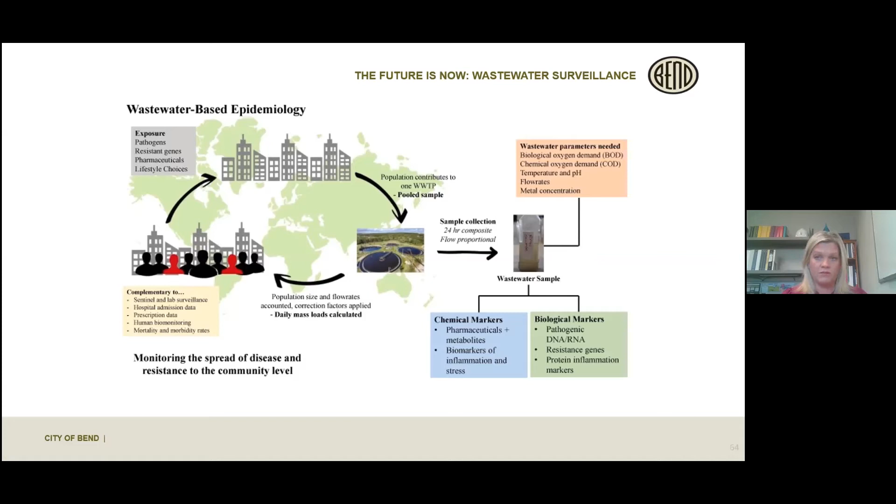So they've already formed a partnership between CDC and EPA and started this wastewater surveillance program. It's going to be a national program. We already have colleges across the country using it to determine whether students can come back into the dorms, or whether they need to be moved into hotels if they see an outbreak. So it's an early indicator.

You can look at the CDC's website about the wastewater surveillance, and it's going to tell you a lot about it and explain in greater detail. So I'm going to kind of give a high-level view of it.

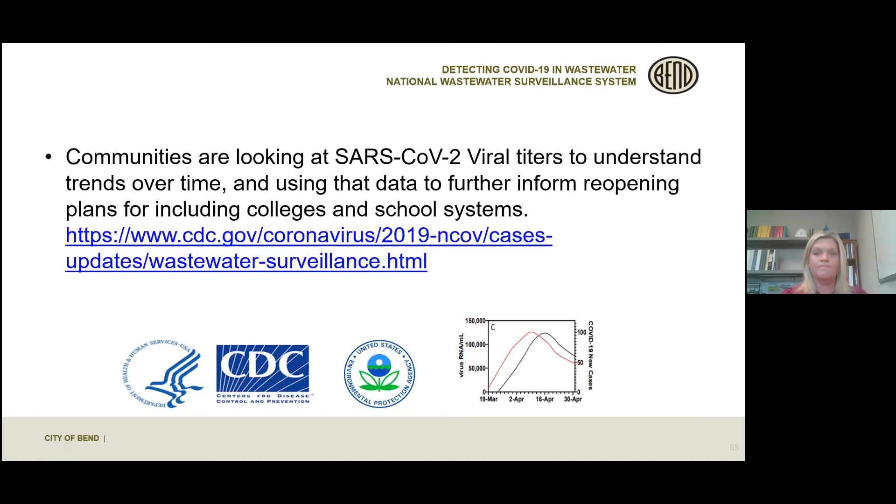So we started out with BioBot, as I said, and then we had Oregon State University reach out to us when they heard we were working with BioBot, and they were interested in doing what we call split samples, so that we would take the same sample and send it to BioBot and send it to them to test a different methodology. So we said, sure, we'll sign on for this.

The other cool thing about the Oregon State study is they wanted to come and do a trace study in Bend, which means go door to door and do nasal swabs on people. At the same time, we installed wastewater samplers to isolate the waste from those neighborhoods so we could compare the wastewater and the test from the nasal swabs door to door. Super useful study—no one else had done that to this point. It kind of looked at how that wastewater epidemiology was working.

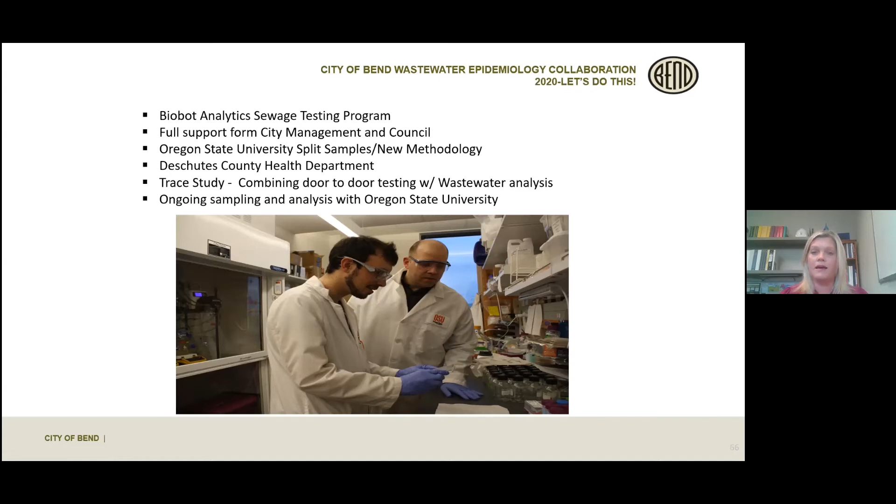And now we are working solely with Oregon State. I want to go to the next slide and show you a video of what we're doing, this little PSA that we put together.

In short, what we're looking for is the coronavirus signature in wastewater. We already had the ability to test for other toxics within our sewer shed, so being asked to test for COVID-19 was not much of an add-on for us.

It's a very rapidly spreading disease, and the fastest way that they can track it is actually through wastewater. The idea is when people become infected with COVID virus, they will shed it through the wastewater, even if they're asymptomatic. So this is a way for us to detect infected individuals, even if they aren't showing symptoms.

And with a single sample, we can monitor an entire city or hundreds of people in a building. So what we hope to have, and I think we're making very substantial progress toward this, is reliable early detection that would give us a signal before we were seeing an uptick in case numbers.

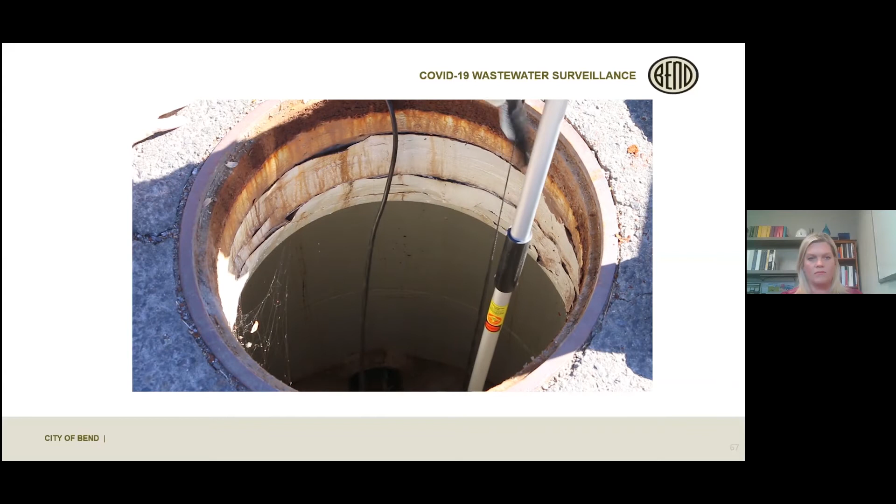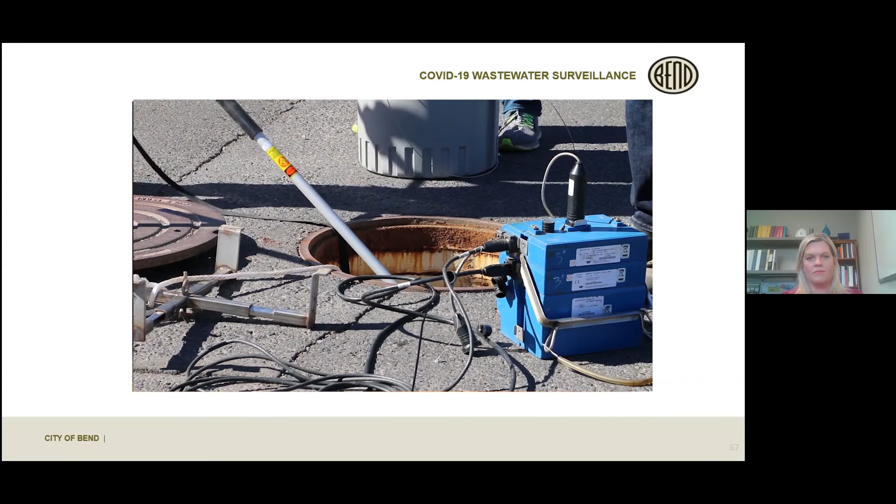We set up composite samplers throughout the city at different points to create sections of the city that we can monitor and look at. We pull up to the testing site and install a sampler into the manhole. From there, once we grab our 24-hour sample, we then send that sample to Oregon State.

They run their tests. The literature on this is fairly clear that in general we'll see a wastewater signature roughly about a week before you'll see other indicators, such as increased hospitalizations or increased cases documented by the local county health authorities.

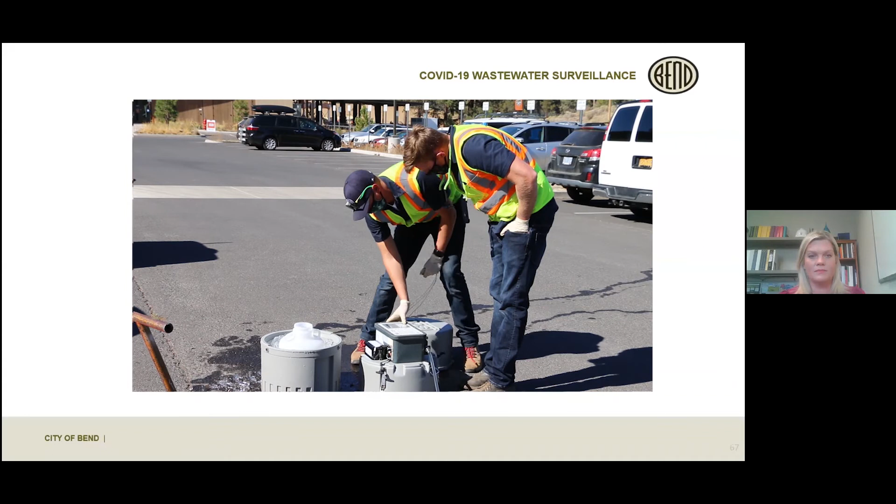We had one relatively large outbreak in a long-term care facility, and we were able to test wastewater in parallel with that and indeed confirm that at the time we had many cases, we were also seeing a detectable, substantial rise in that signal. So the main thing that our department does is we've

encouraged developing this as a potential early warning system. I don't know that it's quite developed enough yet to be reliable as such, but it should be a good way of finding out early if there's an outbreak starting in the community.

It's great for the city of Bend that they do have the forward thinking to be so innovative and to jump onto something that's new and quite possibly could be what's going to solve the next pandemic, or help us predict maybe when a future outbreak will come.

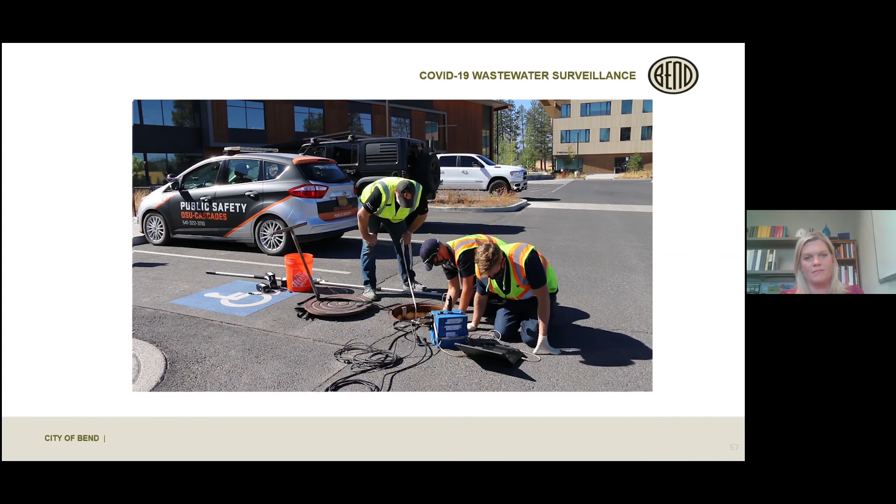Generally speaking, wastewater surveillance has been considered to be a leading edge indicator, giving you about a week's head start on when more infections will start showing up in the general populace.

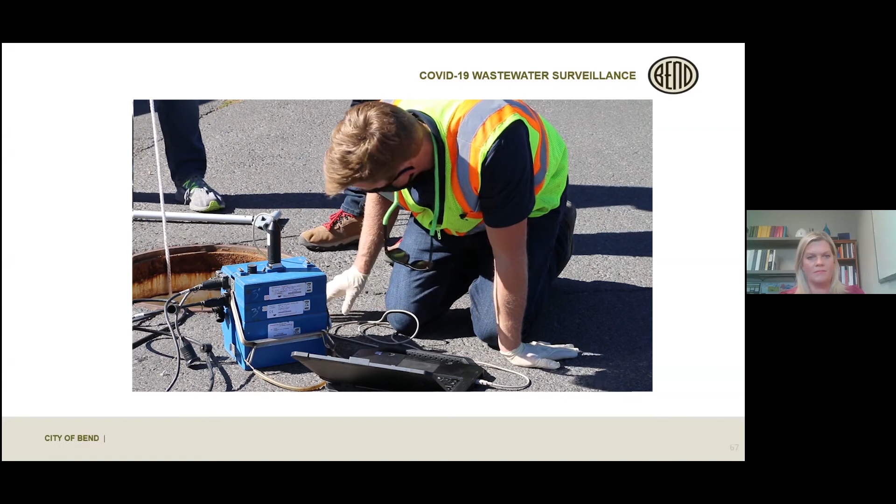We're doing research and development at the same time that we're trying to do surveillance and disease intervention and control. So doing all those together is very complicated. We want to be honest about what we are learning, and then distinguish that from what we hope to learn.

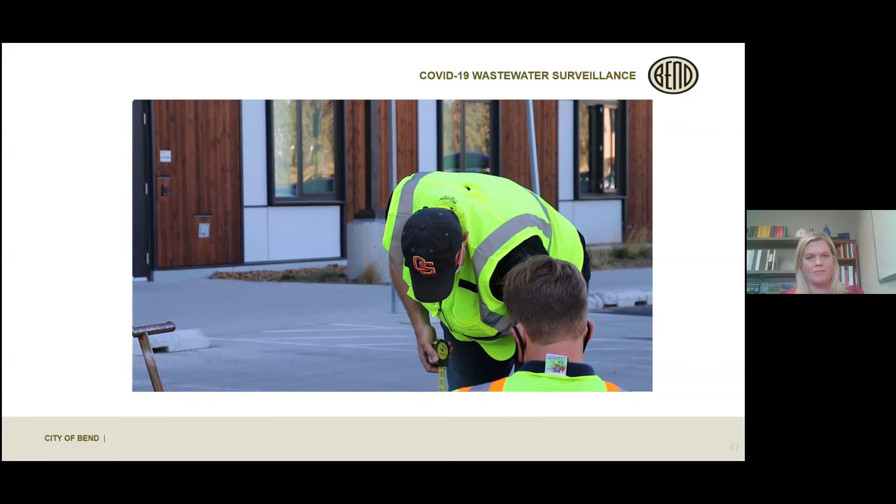Once COVID came along, we partnered up with OSU, and they taught us how to properly preserve the samples for this specific test they do for COVID, the PCR RT analysis they do on the wastewater to show the different viruses within it.

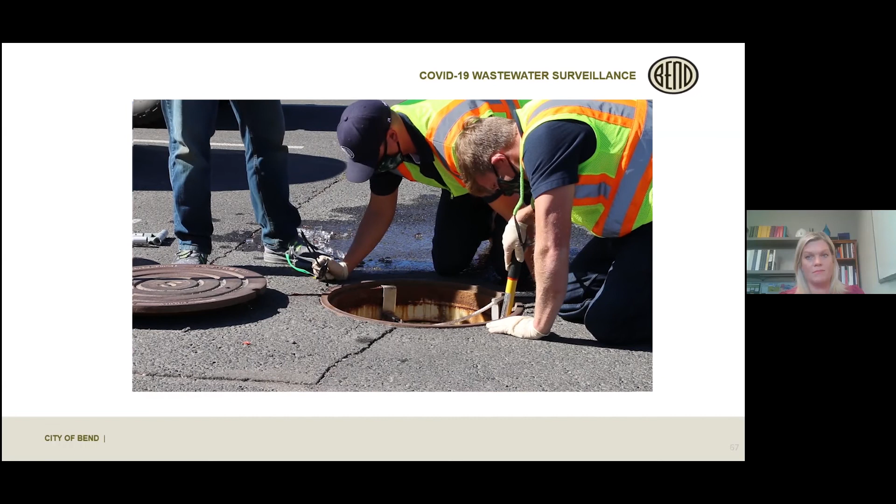Through the Oregon Health Authority, we are now reaching out to over 40 cities across the state to start monitoring their wastewater on a weekly basis for the next 2.5 years. The concentration and sampling effort that Bend Wastewater is doing I think is very fruitful, and the work OSU is doing in parallel with that is very fruitful.

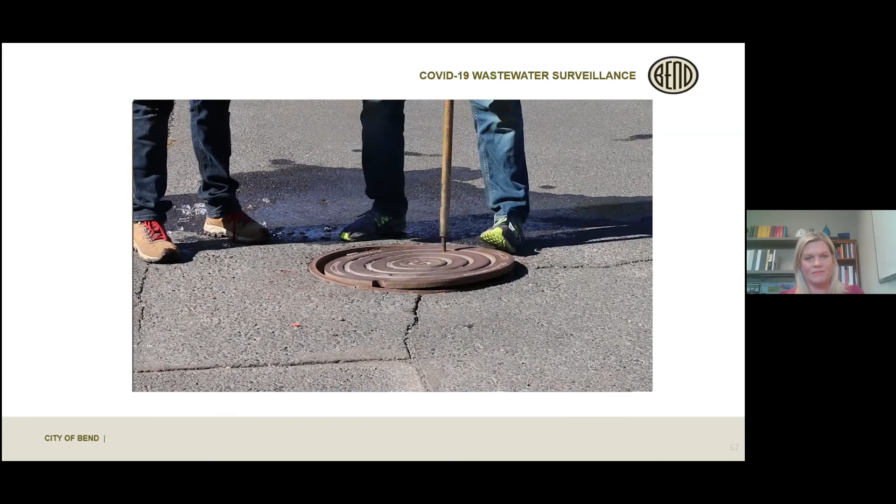Yeah, definitely it gives me a sense of pride that I'm helping keep us open and keep us safe, and if there is an outbreak that we can provide this information.

So as you watch that, the cool thing is I want you to pay attention to our sample manholes, how they were installing equipment in there. And that's something I'll bring up quickly at the end, where the PVC industry could probably help us make our sampling easier, more consistent. So I'm going to completely switch gears now from COVID and go into the brewing industry.

So I mentioned we have this great water in Bend. We've become known as a brew city. Again, like lift stations, we go back and forth with having the highest number of breweries per capita, competing with Portland, Maine, and I think Portland, Oregon. Currently we have 24 breweries, a cidery, a distillery, and kombucha makers. So we have a really thriving beverage industry here in Bend.

Next slide, please. I like to tell a little bit about brewery waste because there's a lot of misconception about it. Craft brew waste is what I'm talking about specifically. In the wastewater industry, when a brewery comes to town, plant managers freak out. I'm like, well, why is this? Because most of them are pretty tiny.

So brewery waste is one of the oldest industrial wastes. This is a picture from a brewery in, I think, Cleveland. Way back, before there were any metal finishers or steel manufacturing, you had breweries, dairies, and tanneries. So a very old waste, and it was very hard on polluting. They were direct dischargers into the river.

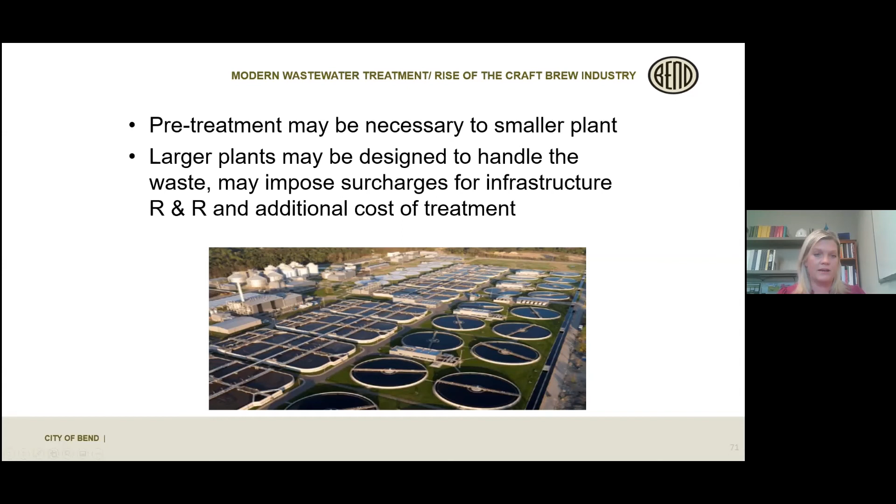So in Bend, we choose a surcharge program. We have the legendary Bend Ale Trail. You can go around to all the breweries and get stamps and try and fill it up. I already touched on that, how many breweries we have.

Just briefly, what we're talking about in the brew industry: if you look at the byproducts to the right, in Bend we try to side stream our byproducts and keep them out of the sewer. So the hops, the wort, and the trub. At most of our breweries, that's side streamed and land applied, or we have one brewery that actually mixes it with grain and sends it to an ostrich farm. All of our grain is used for cattle feed, so that's not a problem getting rid of it. None of that comes to the sewer.

So the problems with brew waste: biological oxygen demand, very, very high. You can see numbers, if you have high strength brewery waste, that wort and trub coming to the treatment plant, as high as 20,000 milligrams per liter. So super high strength waste. Total suspended solids, if they're not doing a good job separating out the solids and there are a lot of solids coming down, you can have a big problem with clogging and increased waste treatment costs.

You can have extreme pHs, and this is what's hard on the infrastructure, those manholes, and I'll show some of what happens with the corrosion. pH of 3 to 12, they clean with caustics and acids, and beer itself is around a 4 pH, so you can get pH extremes. We see temperatures sometimes over 165 degrees. We have one brewery that's under a compliance schedule at the moment because we were seeing temperatures of 180 degrees. When you combine that with hydrogen sulfide, you get sulfuric acid formation in those manholes. So incredibly corrosive, even in the pipes.

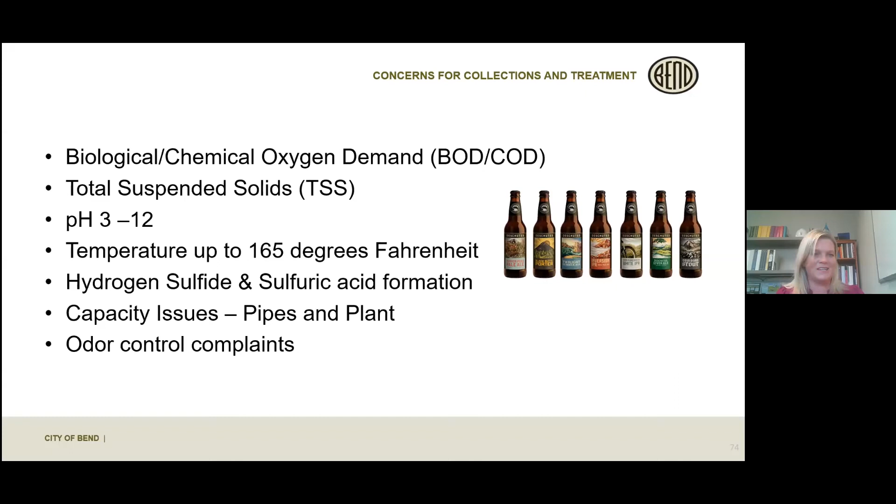This is Deschutes Brewery, our largest brewer, as I mentioned, around 500,000 barrels a year. They are our only brewery that's actually under a permit because they discharge more than 25,000 gallons of waste to us a day. They're around 150,000 gallons of waste that comes to our treatment plant. And then they have 6 to 8 truckloads, 5,000 gallon truckloads, of high strength waste that is land applied. So quite a bit of wastewater coming out of them.

We did a unique project with them and installed this sampler inside their waste treatment facility instead of in a manhole. The manhole was not working for us because of some challenges with how you can get a flow monitor in. Again, that's where the PVC can help.

So why do we sample the breweries? Very important, and this is something I kind of hammer on cities to really establish. If you're trying to grow industry, we heard of these challenges that might be facing us. I just talked to our economic development people on Monday about how they don't want to lose any breweries and they want to attract more industry to Bend. So using sampling data and understanding your wastewater characterization is super important to building what's called a maximum allowable headworks loading to your treatment plant and a maximum allowable industrial loading.

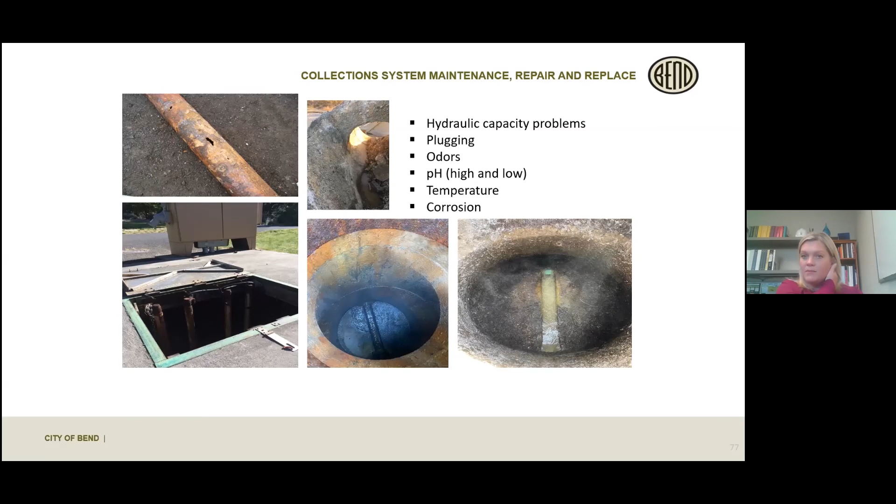So if you go to the next slide. In Bend, we install sample manholes basically on any industrial or commercial property, with the assumption that a metal finisher could come in, or whatever, a dairy, a brewery, so that we can actually sample for our program.

The unique challenge of this, if it isn't an industry that has significant volume coming through, we have a very dry climate. That means if there's just waste products coming in there, with the concrete, super dry, it gets cemented in there. We ended up with septic tanks in our sample manholes. So we started coming up with this idea, and some people are doing it, where they're lining the sample manholes with PVC piping, and it helps because, of course, it's got that smooth surface. There's no drying of it because of our super dry climate.

And again, we have 480 pump stations. We also have really new building, we've been a fast-growing city in the last couple decades, doubled our population size. So a lot of green building, which means lower water use. We also have no combined stormwater, so we have little or no inflow and infiltration. We have a very aggressive water conservation program, so that makes our concentration of our wastewater super high.

When we started actually sampling our residential wastewater, we recognized that it is at about 500 BOD, some places 600 BOD, and that's purely our residential wastewater. There were all these assumptions that the breweries were actually contributing a lot more loading to our plant, because they were assuming our BOD was at 250 for residential. So we have really high strength wastewater, and there are other cities seeing this around the country.

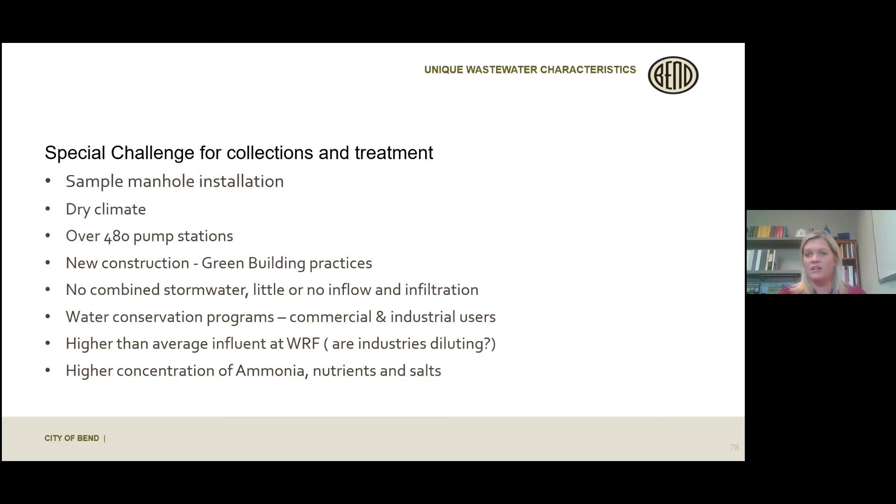Again, the other thing when we look at the sampling I was talking about, you saw our guys installing the flow meters and the samplers into the pipes. A lot of trouble we have with the PVC pipes fitting into the concrete where they've grouted around the PVC, we can't get those bands in. So again, that's another reason we're pushing for our engineering people to require PVC lined manholes instead, so that we can easily get those bands in and not have to go down and chisel out concrete. It's hard to have an inspection program that catches all of those things. Sometimes they're grouting the troughs by hand when they install them too, so you can think of the friction in there. Next slide.

And that's it. So I went through that really quickly, I'm kind of out of time. I know there's a break after this if people have questions, or I'm happy to take emails or whatever.

Sorry, Ned, do you want to go? Hey, Christina, thank you. Wow, what a fascinating presentation. I need to go to Bend and see those pipes, but maybe try a couple beers too.

Yeah, we can take you on what we call the source to brewer to sewer tour. We'll take you through our water supply to some breweries and then out to the treatment plant, so you can see the full thing.

Awesome. Thank you. I do have a couple questions, if you've got a minute. Sure. One question was, what is responsible for the rapid corrosion of the iron pipes, and how does PVC present an advantage? So that pipe that I showed was from a lift station downstream of a brewery.

So with a large brewery like that, we have a 5 to 11 pH in the city of Bend in our sewer use ordinance, so you can get these extremes in pH with brewing. They clean their kettles with a caustic solution, so that's usually up around 12. And then they will come behind that with some sort of acid sanitizer. In Bend, the most common thing is hydrogen peroxide, a hydrogen peroxide, peracetic acid, and nitric acid mix.